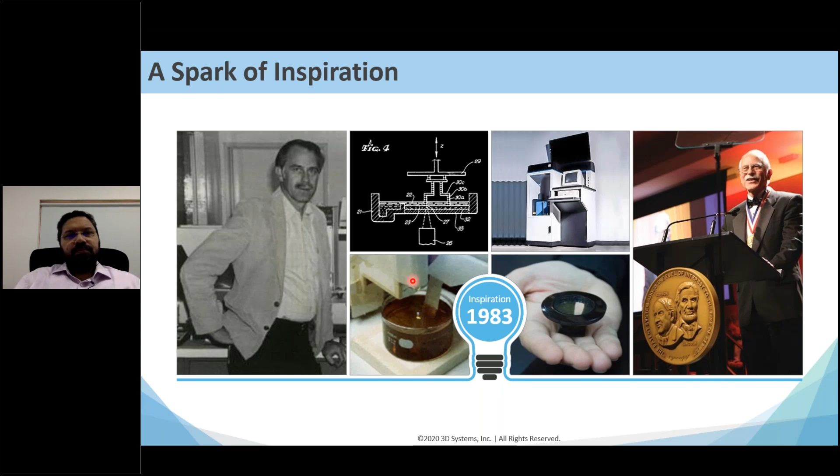Another slide about our company. We were founded in 1986, and we have around 2,600 employees worldwide. We are available in 68 countries, either directly or indirectly through our channel partners. We have 13 facilities, and around 1,000 plus global patents. There was a time when we had more patents than employees, but ever since we have scaled up, the employees have become more. We are headquartered in Rock Hill, South Carolina, in the US.

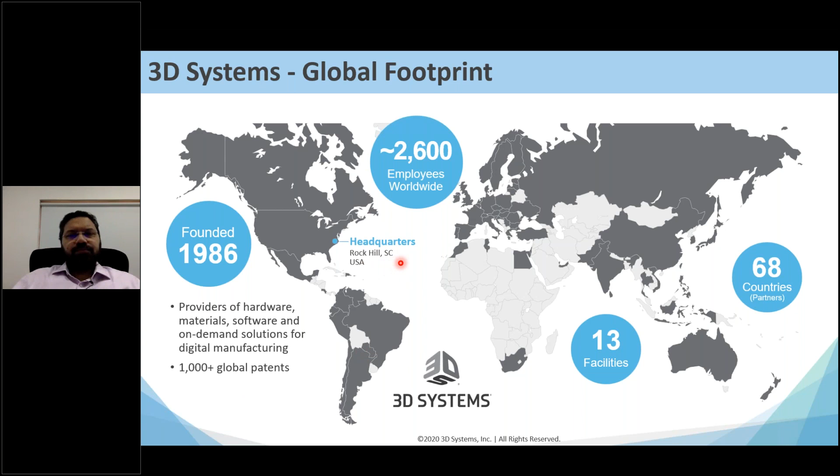These are the main industries that we cater to. Healthcare is one. There's dental; although dental and healthcare fall under the same thing, the dental solutions are very different, so that's a separate vertical according to us. Aerospace, automotive, and also durable goods. These are the major verticals. However, there are other smaller industries like jewelry, jigs and fixtures, and casting, which can go across these industries and play an important role as well.

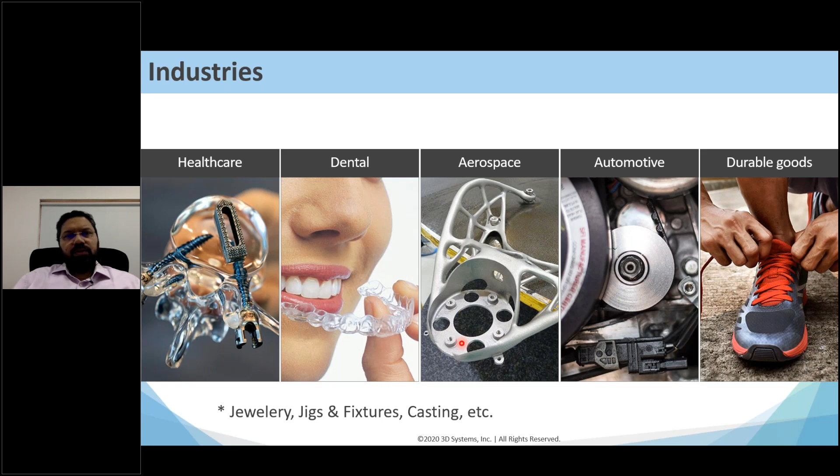So my talk is basically about the emerging trends. But before I get to that, I want to show you a few parts that have been 3D printed. This is a buckle. This is a vent of an automotive car. This is a full color model of a tool. This is a 3D printed model of an engine, a manifold. This is a full color model of a shoe, and this is of a rubber part. It's flexible. This is a metal print of a dental prosthesis.

In this image, you see three things. This is a wax printed part, and this is the casting made out of the wax printed part. This is also the wax part, and this is the casting made out of it. This is a medical implant. It's a spinal cage actually. And this is a metal part of a fuel injector, and it's a section which shows you how intricate it is. This is also an SLA part, basically a pattern used for casting.

Now, the reason I'm showing you this is because over this week, you are going to learn a lot about 3D printing, different processes, different ways to print, STL files, CAD models, and everything else. What I need you to keep in mind is that there is a difference in the end use: prototyping versus production. To the left of this line are prints used in the prototyping stage, and on this side are all parts used in the production stage.

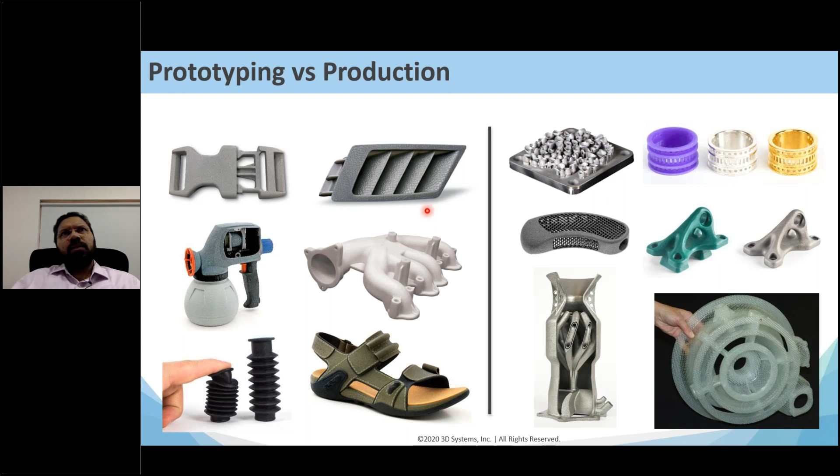And eventually you will use maybe plastic injection molding or say vacuum casting to actually make these parts in bulk. Okay, so this is something that you have to keep at the back of your mind, and then you will understand where I'm going when I get to the slides about the emerging trends. Okay,

so there are 4 emerging trends which I'm going to talk about over the next 1 hour. One is how 3D printing is being used to maybe do the part of vacuum casting, maybe do some part of injection molding, maybe do some part of medical implants, which is turning out to be a far more interesting way of making implants now, and I'll explain why.

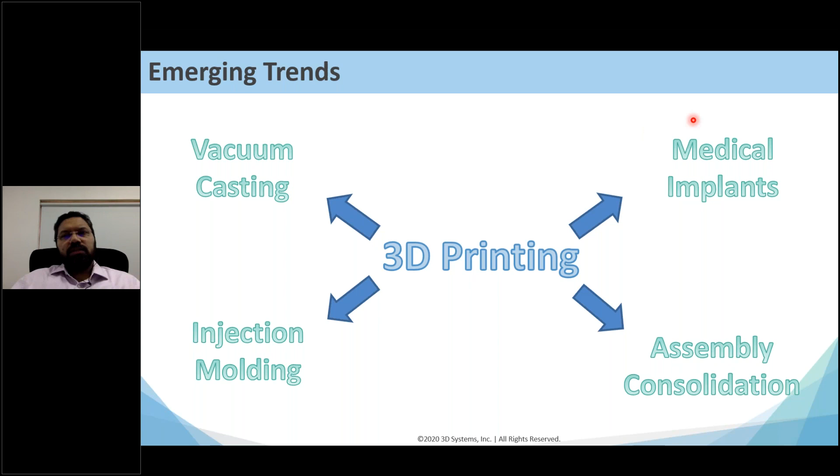Also, assembly consolidation. This is a term used to, if you have a very complicated assembly of parts, do you really need to have that assembly of say 5, 10, say 20 parts? So can you re-engineer the whole part so that it is just 1 or 2 parts, and then you use the benefit of 3D printing? So these are the emerging trends. I will tackle both these in one set of slides, and then have separate slides for the implants and the consolidation.

So let's talk about the traditional manufacturing. So this is more on the plastic side of the business. So if you look at this graph, on the y-axis you have the unit cost. That's the cost to print a single part. And on the x-axis you have got the quantity. So if you see orange, injection molding, the curve goes like this. Why? Because if you have to print just a few parts, the cost per part is very huge. Why? Because you have to make the mold, and you have to machine the mold. That takes a few weeks and then costs maybe thousands of lakhs of rupees.

So if you want to manufacture just say 20 parts, then the cost per part is going to be very expensive. But as the quantities go higher, then the cost per part drops down. So injection molding makes sense when you have to manufacture a large number of parts. There are sometimes you need a lesser number of parts, and injection molding may not make any sense. So you use vacuum casting. So vacuum casting is not a process which can be used very effectively to manufacture thousands of lakhs of parts. It is for smaller numbers.

So if you see in blue, this line is completely horizontal. It's flat. Why? Because the cost per part for 3D printing doesn't depend on the quantity. You have a printer, you have the material, there's a fixed cost that you assign for one part, and that part cost comprises of the cost of the material and cost of the printer over time. So it's basically a fixed cost. So 3D printing completely is able to replace vacuum casting. So the rule of thumb is that whenever you have an application wherein you have been using vacuum casting to manufacture a few parts, that can now be completely overtaken by 3D printing.

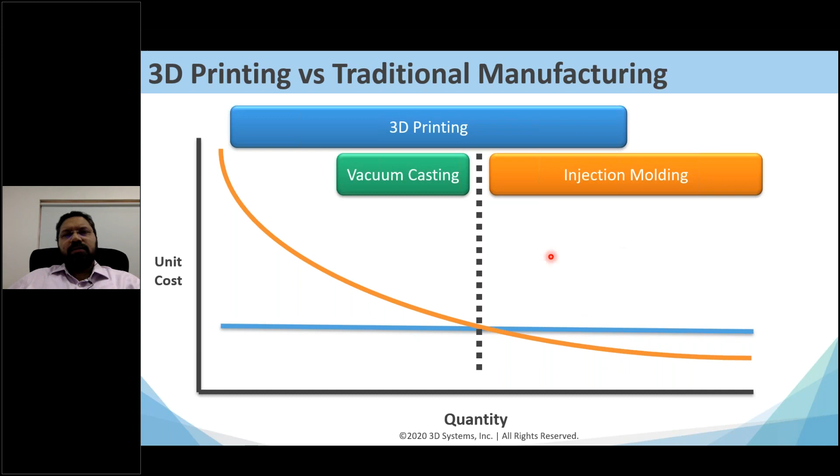If you see, this also spills over to the injection molding side. So that's also true. Over some part of injection molding, it still makes sense, and I'll explain why. Because although the cost of the injection molded part is lower, and the cost per part of 3D printing is higher, there are some instances wherein it still makes sense to use 3D printing. Okay, and as I go through the presentation, you'll understand why.

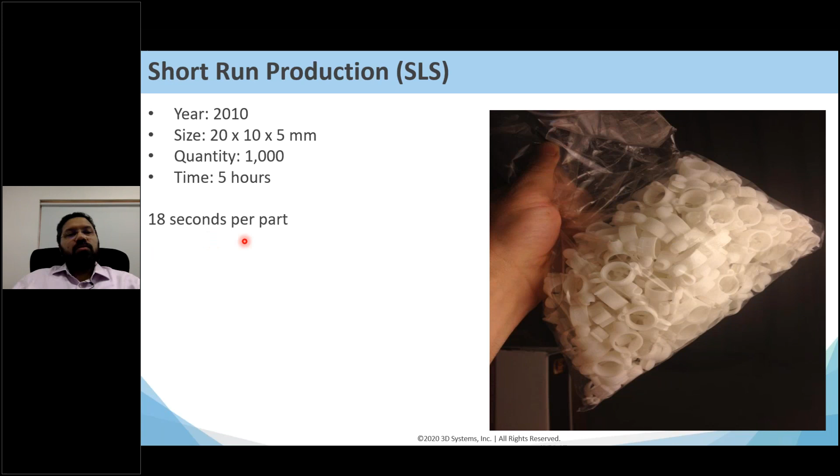So let's talk about production, how it happened in the past. So this is an SLS printer, and this was done in the year 2010. We wanted 1,000 parts, and we were able to print it. So this is an example of how we used 3D printing for production about a decade ago. Now, what you don't see here is the cost per part. The cost per part was quite expensive, but there was a need because these parts were actually required urgently. So that is why it was done. So if you filled up the platform completely and made all these parts, this is the amount of time it took to print per part, which is extremely small.

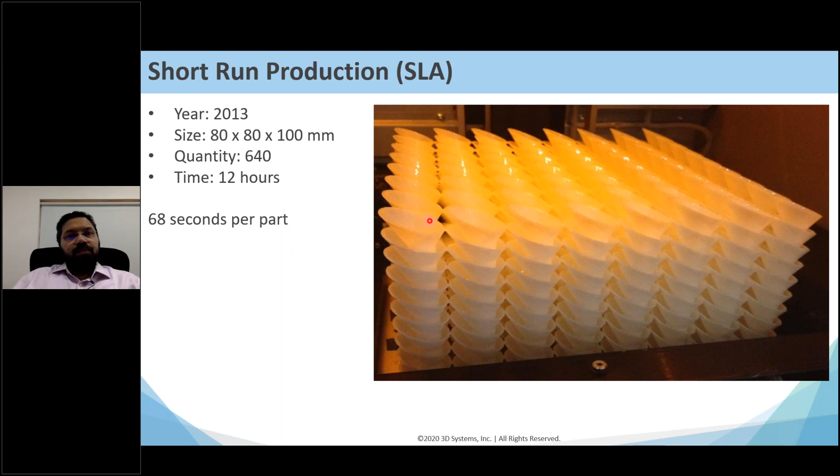This is another example of an automotive part. So bridge manufacturing is a term used in the industry when you need to have parts urgently made as a bridge to the traditional way of manufacturing.

So this was an automotive part. There was a last minute change in the design, and until the tooling could be made, there was an urgent need to actually release the car. So we went and printed all these parts, and that's how it was done. And then after, we came to know that it's not economical to print, but due to the time constraint, that's the decision that we made.

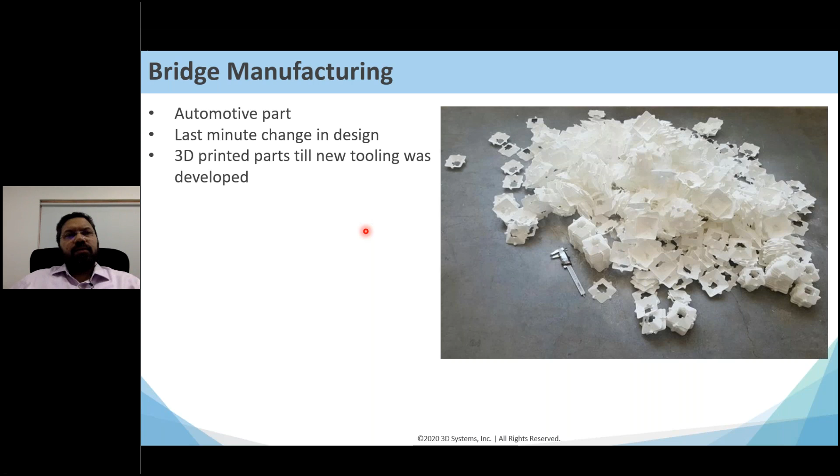Now I will come back to these 3 slides later on because I want to show you an emerging trend that is coming, which is going against all this logic now. So I want to introduce you to one of our printers. We have an entire range, but this one is important because this shows the trend. This is called a Figure 4 Modular.

Okay, it's a different kind of a printer. It's not just one printer with one platform and then you print some parts on it. It basically has a controller, and there are modules. Each module can have a different material and can print a different part. Now, this controller can control up to 24 modules. What this means is you can basically set this up as a small factory.

Okay, this is the build volume, and the thing to be noted here is the print speed. We can print about 100 mm per hour, which is very fast. In the 3D printing world, this is a very fast kind of a speed. You can see with this kind of a printer, you can print about 10,000 parts per month. And the material is fed completely automatically, and the curing is done in basically minutes. So this uses a resin, and it is cured using a UV light.

And as you can see from the pictures here, there are no visible lines at all. If you've seen maybe an FDM printer which you'll have made in your lab, you will find lines, right? Those are the build lines. Now you will see that if you put load on that part and stress it in all kinds of ways, there are weaknesses in the part along those lines, because they're built in layers. So although it is fused, still the material properties are not isotropic. Isotropic meaning whichever way you orient it, the material properties will be the same.

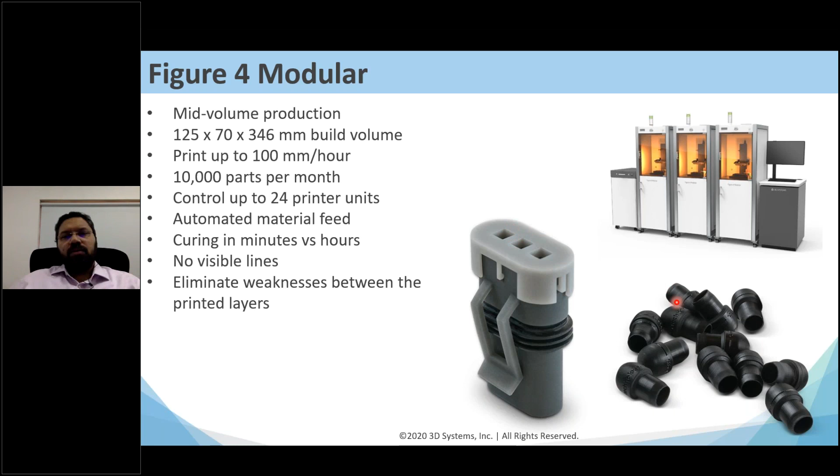But if you see here, this is the kind of surface finish and the detail that can be got with this printer. And in the next slides, you'll understand why this is important in terms of manufacturing. Another important thing is the material.

One thing that happened all over these years was that there were some printers that could print very fast and could print in large volumes, but the material that was used by them to print didn't lend itself well to a production environment. For example, if you take a resin and you cure it to form a part, that part is then exposed to UV light that's in ambient. So there is obviously sunlight on it. So over time, these parts get overcured and then they turn hard and brittle. So although this was good for prototyping, if you use it in a production environment, sometimes it wasn't good.

So we as a company have now come up with materials which have long-term environmental stability, like 5 years or so. There's also this particular material called the PRO-BLK 10 that has got very good mechanical properties as well. So the HDT is quite high. It means that it can be kept in the sun. It won't deform, it won't break, it won't turn brittle, and it's got a good elongation at break as well.

If you see this picture here, the part was pulled from either side. Before the part snapped, it actually necked. So necking is when the part turns smaller and then it breaks. This is a very good property of thermoplastics, which this material now has. All other previous materials that we had didn't have this kind of a property.

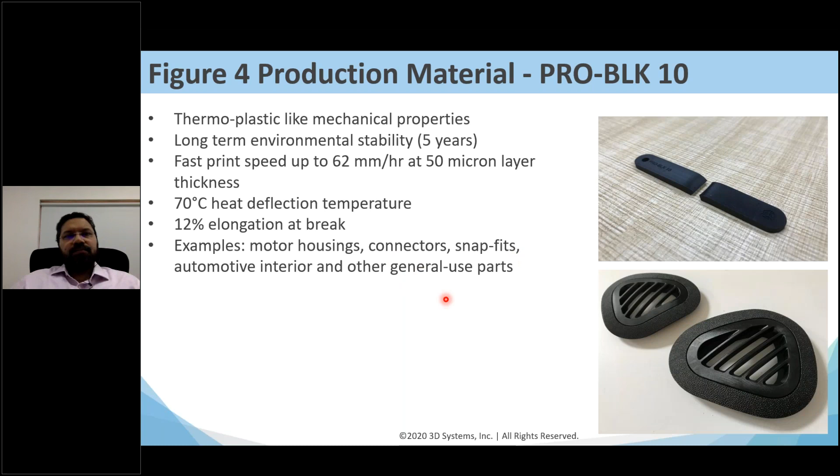So let me give you an example. Let me actually run you through an example. This is an automotive part. Now, this part was actually an assembly of 4 or 5 parts. This is a part used next to the windshield washer. So to give an idea, a zip tie goes in here and comes out from here. There is a washer put here and a bolt goes through to actually secure the part. And here is a sensor. This is what it is. This has been re-engineered now.

Now, if any of you have got some experience in injection molding, you'll soon look at the design and see, okay, this part cannot be made using injection molding. How are you going to make the mold? Where actually will be the parting line? How are you going to maintain all these channels? Okay, so this shows the benefit of 3D printing in the sense that you can now come up with designs which can be printable and which cannot be made in any other manufacturing technology that is there right now.

So we'll use this as a nice example to show what the emerging trends in the market now are. And this is what you should start to think when you go through this course and also do your research. Don't just think of taking parts that are already made in traditional ways and printing them. That is solving half of the problem.

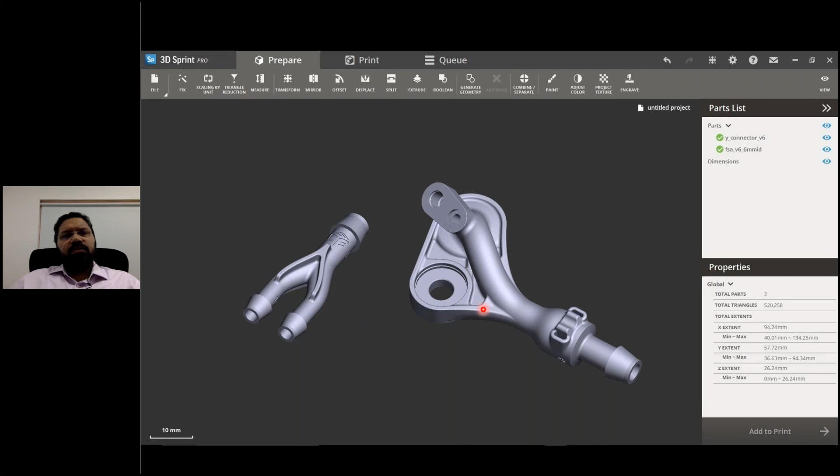Yes, so you have to ask all these questions. This is the real value add that you'll get from a course like this. So let's use this example and go through the entire process of actually 3D printing these two parts. It's a pair actually. Okay. So this is how we basically set up the build. So this is the build volume, and we have done vertical stacking, and we have nested the parts to such an extent that we have used almost all the space.

Now you have to understand this is a production application. Okay, so let me give you an idea. We needed thousands of these parts to give as handouts at Formnext. Now Formnext is the world's largest 3D printing exhibition in Germany, and last year we wanted to print thousands of these parts. Okay, so we had to basically assume that this was a manufacturing application. So this is not prototyping anymore. You just don't want to print one part, you want to print thousands of them. So you have to think differently. You have to set up your printer in a way to optimize everything.

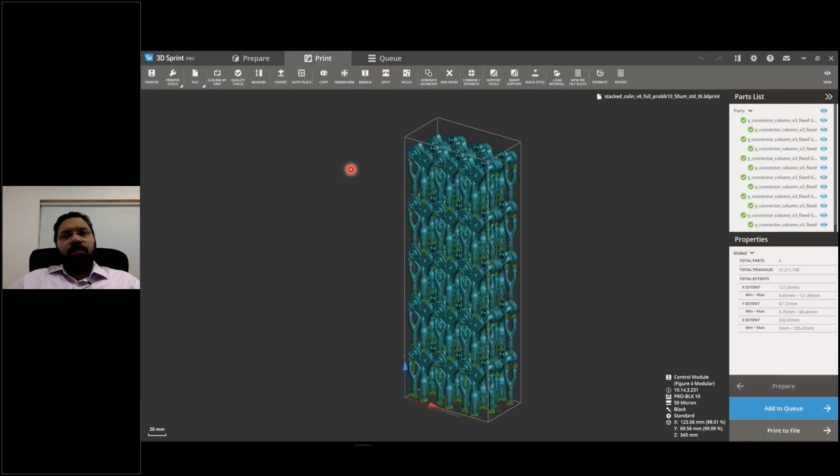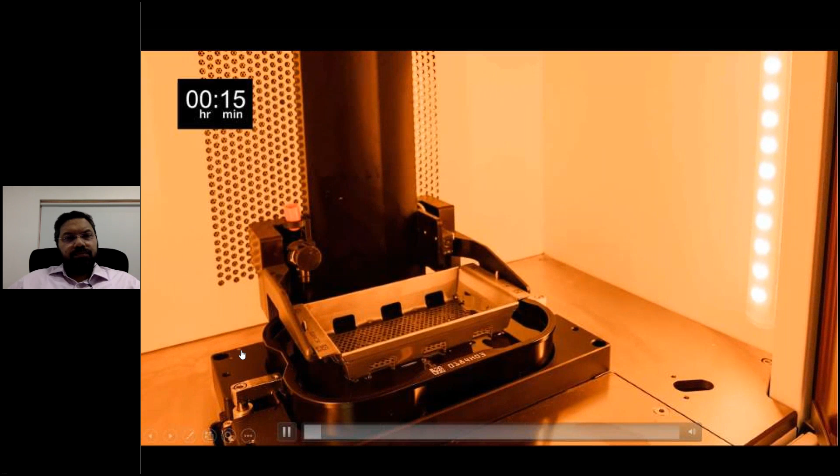And I'll just play a video. Maybe you'll not hear the sound, but it's only music. But it's a time-lapse video. So you can see 2 hours here. So in about five hours, we have printed 120 parts. So it comes to 2.5 minutes per part.

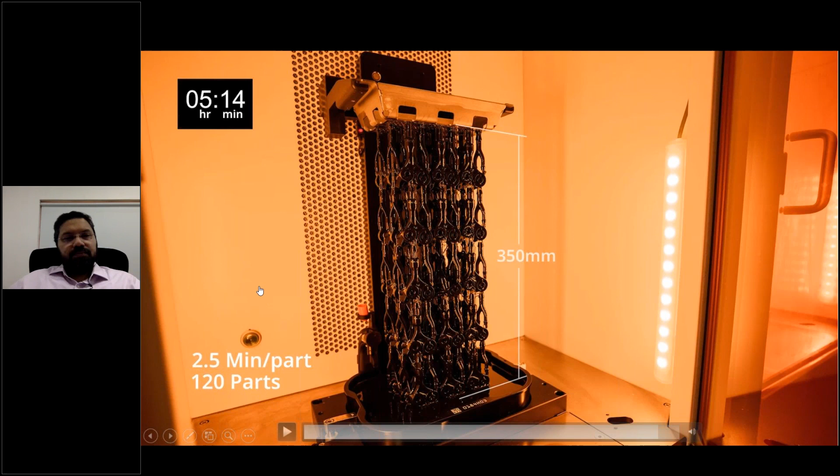Okay. Now, remember what I said earlier about the cost per part, right? Using the older ways of SLA, SLS, the cost was extremely expensive, but then it was important to do it because it was a time critical thing. So they said, okay, let's spend some more money, but print these parts instead of waiting for the tool. But now look at these prices. This is a design which you cannot make by injection molding, okay? And it costs only $2 per part. This part cost 62 cents.

This is amazing. And this is the emerging trend that we see in the market right now, which is being adopted in the US and in Europe. So the Figure 4 Modular is being acquired by a wide variety of companies as we speak, and they are seeing the benefit of this, and they are seeing that they can completely change their designs and print parts which they could not manufacture.

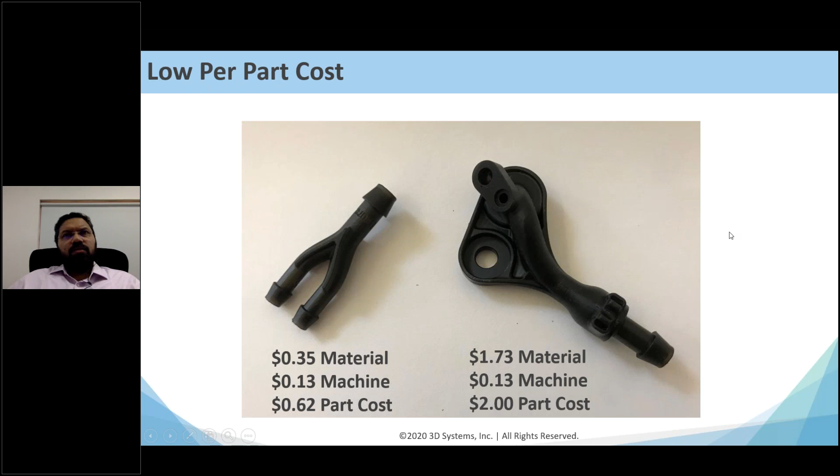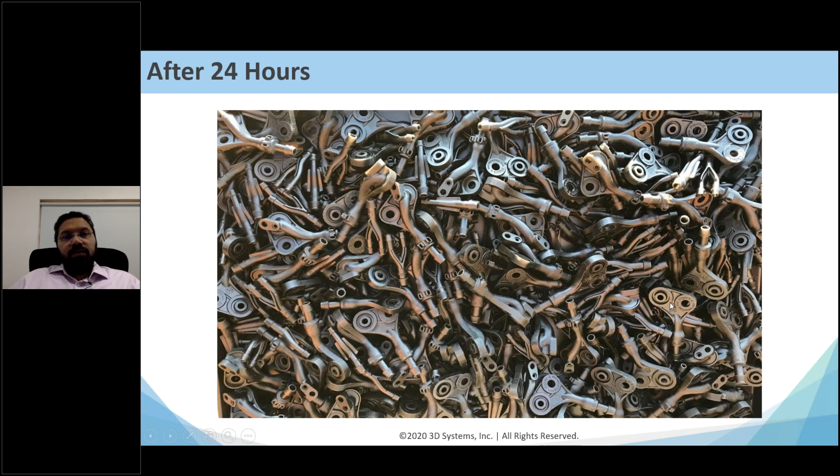Okay, now this is what happened after 24 hours. These are the number of parts that we got. As you can see, it's lots. This was after 48 hours. So basically, we had to put all these parts in one big box and ship them from our San Diego office where these were printed to Germany, and then we used to hand it out to everyone who came at

our booth. This tells you that now 3D printing with the right printer, with the right material, and maybe the right design as well, can be used for manufacturing, and it is economical, it is better, and it is much more cost efficient as well.

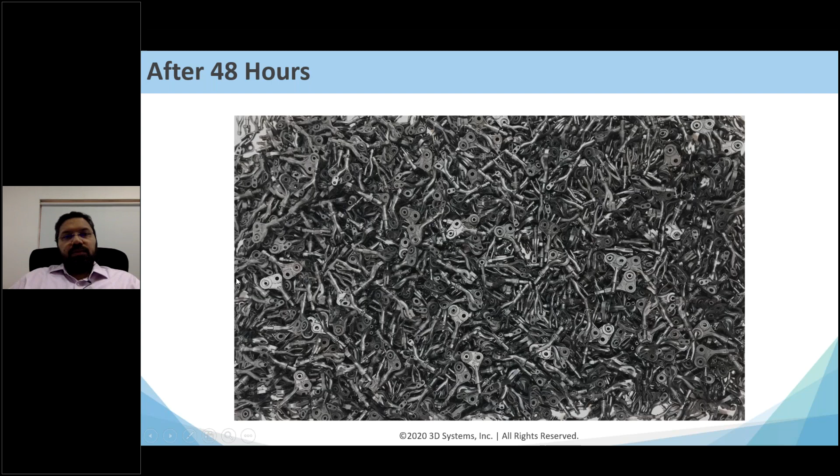They say the proof of the pudding is in the eating. So here is an example. This is basically the picture of the Figure 4, and you see this part over here that's actually blown up. This part is actually printed on the Figure 4, and we are saying why not? Because we just need maybe 500 to maybe 1,000 a year, because we just launched this printer.

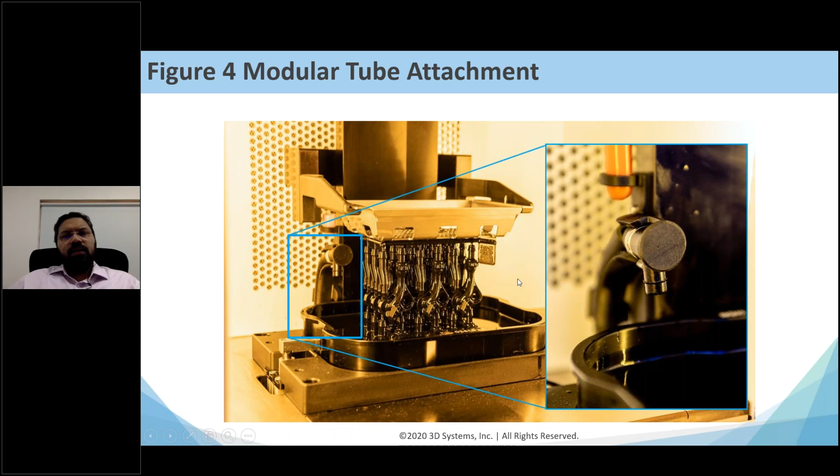There's no need to make a mold to actually manufacture this part by injection molding. So we just planned, let's just print these parts, and this is the design. Now here's the interesting thing. So in a batch that takes 8 hours to print, we can print about say 12 parts. So it comes to 40 minutes per part, and that's okay. Why? Because we just need 500 to maybe 1,000 a year. So it's fine. But here's the interesting thing.

This is a new product, right? So there can be times in which we may need to change the design all the time. So maybe this angle needs to be turned more, maybe this hole has to be got in front. So if we had a mold, we have to redo the mold the whole time. So that turns extremely expensive. There's also lead time. So here, quick design changes are possible if we print. Because if we say, okay, let's move this thing over here or change this angle to make it thicker, then that can be done the next day itself.

You can prototype it and then directly print it. Maybe the part fails here. Maybe we have to have 2, 3 ribs over here. So we can immediately do that, and this enables us to have a just-in-time management for inventory. So you don't need to place an order with your supplier saying, okay, I want 500 of these parts, go and give it to me. Then your design say changes halfway. You go back to the guy and say, okay, I want this part in this color. Then he can give it to you in that color. So

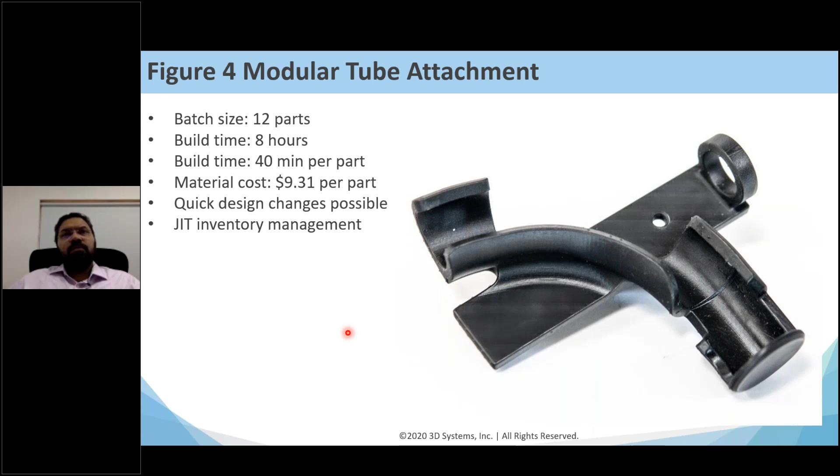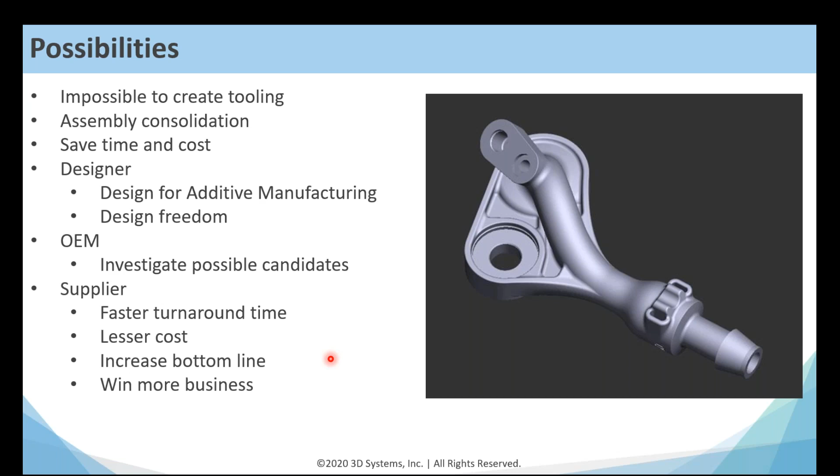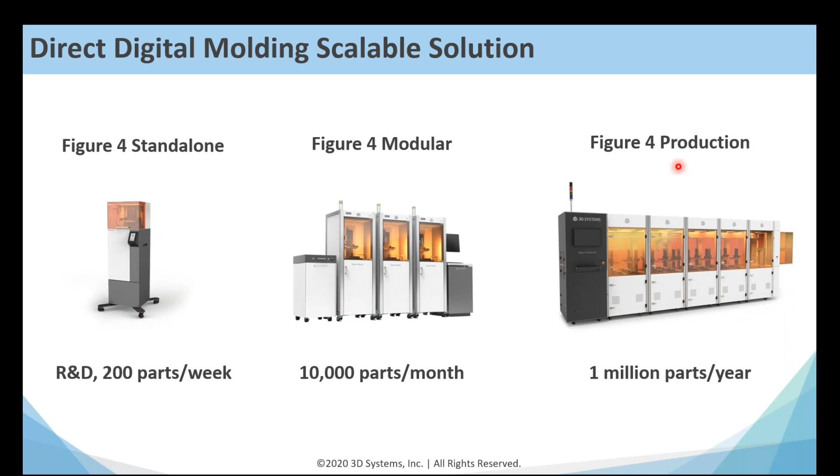Now, if you want to really scale up, print like 1,000,000 parts a year, then we have got something called the Figure 4 Production as well, which is basically there are 4 print engines in each module here, and there are also robotic arms that come and pick and place parts, wash them, dry them, and it is completely insanely customizable and also automated. Okay, so this is where it is now.

The next emerging trend that I would like to speak to you about is the use of 3D printing technology for medical implants. So let me just walk you through the workflow first. The end product is this implant that you need for a patient. So first you scan the patient, then you use a software. This is our product. It's called D2P, but you can use others as well, which takes the CT scan data, which is basically black and white or grayscale 2D slice images, and converts it into a mesh. Then after that, the next step is to use an organic modeling tool to actually design that implant.

To help in the organic modeling, we also offer a haptic device, which is basically a touch-based thing. So it works like this. You hold this like a pen and you move it around in space. And wherever the cursor hits an object on the screen, you get a force feedback. So it's like sculpting. This is good because you cannot make a design like this in something like SolidWorks, because that uses lines and arcs, and a human being is not made up of lines and arcs.

After you make the implant, then you need to lightweight it. You need to make internal and external lattice structures, which really give you the benefit of 3D printing this. This is another software that we have called 3DXpert. In fact, you all have a license of this. A license of 3DXpert comes along with the DMP Flex 350, which is there in your lab. Then after you do the design of the implant, you actually print it in a 3D printer, and then you operate. This is basically the workflow.

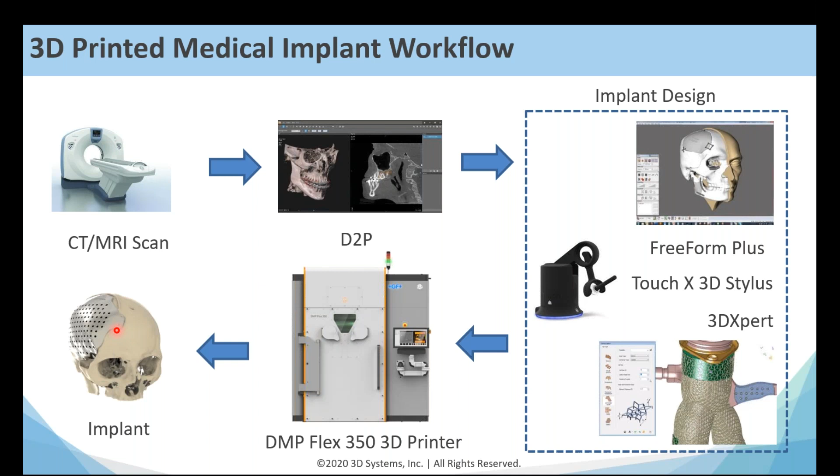So this is the benefit of doing this by 3D printing. You can make volumetric lattices like this, and also surface lattices. You can parameterize them. So you can actually open a dialog box and choose the parameters of what should be the pitch and the angle and the number of nodes and the kind of design.

Then choose the volume on your screen and say fill, and this whole thing will be automatically made. You can print it, then you can test it, and then if it is not good, then you can come back here and change the design, just a few clicks, and then you have a new lattice structure.

Now, why do you need lattice structures? See, this is an implant. This is going to go into the human body, and this is going to go and attach itself to one end of a bone. Now the bone needs to fuse with the implant. If it doesn't fuse well, then it will fail, it'll come loose, and then the patient will need to be operated on again.

So because you can print insane geometry like this, that is why you have better osseointegration. So the bone will grow into it, like the roots of a tree. Even if there's a high storm, and the top of the tree is being pulled and pushed everywhere, the roots are so ingrained inside the soil that the tree doesn't move anywhere, right? So that's the same kind of concept used here as well.

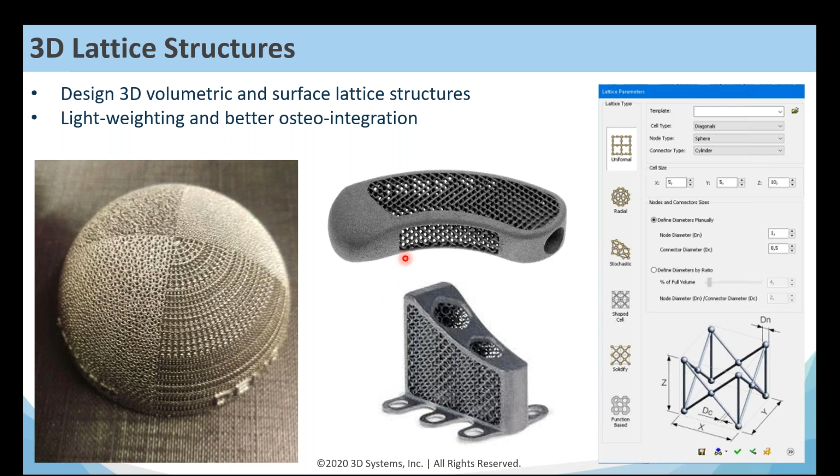Also, there may be cases wherein the bone needs to grow over an implant, because the implant needs to be really strong and solid, but the top of it needs to be very rough. Now the traditional way of making implants is by CNC machining. Now you can see this can't be machined; it's impossible, right? But using 3D printing and using software that lends itself well to this kind of an exercise, you can actually come up with some really nice implants with a very low failure rate.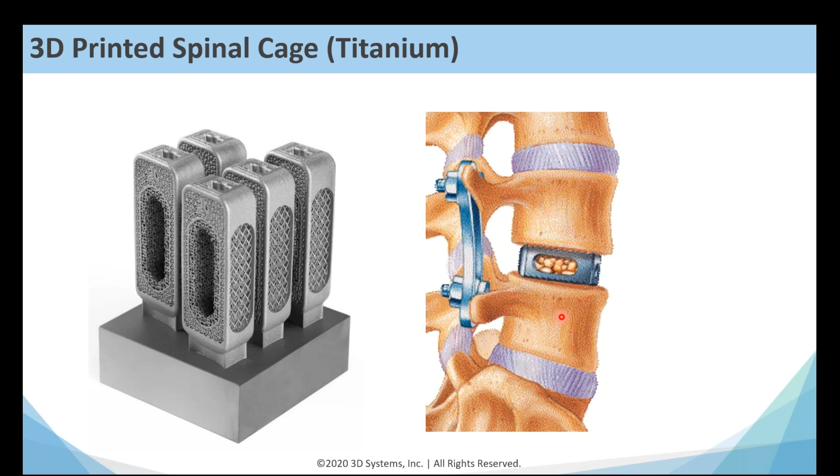So this is a slide explaining osteointegration. So this is a spinal cage made on a metal 3D printer, and this is used as a replacement. So this is a spine, and this cartilage kind of a thing was removed here, and an implant was put in its place, and then you can see the bone that's growing completely into it. This is how osteointegration is done.

This is another case of a canine implant. So this is an implant for a dog. So there's a condition where the lower limb of the dog is weak. So what they do is they slit the bone, and then they put this implant and they screw it here, here, here, and here, and that's how they give this a thickness.

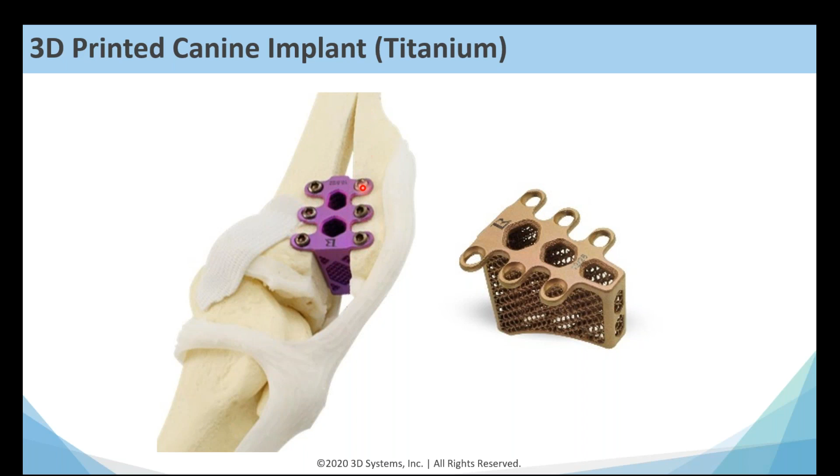This is a case of an implant done in Erode in Tamil Nadu. This is a live case actually. This was a very complicated case. As you can see, there was a cancerous kind of element in the lower jaw and also in the top part of the jaw. So this one case needed 3 implants, one for the lower part of the jaw, one on the top right, and then the top left.

And all this was done. So this white thing is also 3D printed. So we use the 3D prints of the bone to test the metal implants as well. And then finally, the operation was done, and it was a success.

Now imagine if there was no 3D printing. What would happen was the doctor would have to use the CT scan data, look at the X-ray kind of images, and try and guess what the situation would be when he operated. And then he would have to open up the patient and say, oh, I thought this was the case, but actually it is not. The case is a little bit more complicated. Then he would have to think on his feet, and he would have to cut more and plan less and do all kinds of stuff.

And then he would have to take pieces of, say, titanium and actually bang them into shape. So this is what actually happens in the OT. There are heavy metal tools which the doctors use like a blacksmith, and they hit pieces of titanium so that it gets shaped to suit the patient. There are times wherein they have to modify the patient to suit the implant, because they can't change their implant anymore because it's quite complicated. So all those variables are taken care of by 3D printed implants.

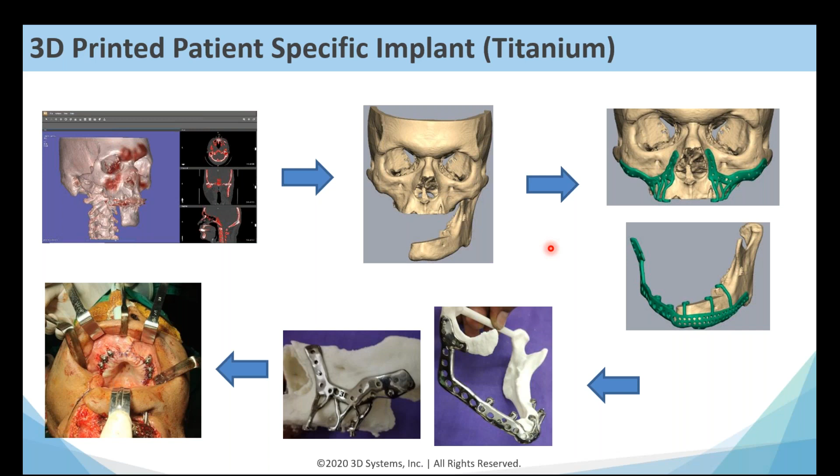The fourth and last emerging trend which I want to talk to you about is assembly consolidation. Now, if you look at this, this is an automotive exhaust, okay? This comprises 20 parts. And if you look at these parts, you can see that the person who designed this was already thinking about how he was going to manufacture it. He had certain manufacturing processes in mind, and that is how he had to take his idea of a full-blown exhaust and cut it up into parts so that it could be manufactured.

Then what happened is we told the guy, okay, you have got complete design freedom now. You have to follow the rules of 3D printing, which we'll explain to you, but you make up your automotive exhaust completely as you like. And what he did is he reduced the 20 parts to one part, and this is the thing. This is completely made using 3D printing as one piece itself. It is the same job, but it's actually better because in the end there was a 75% reduction in production time.

So you can imagine how much time it'll take to make each one of these parts. You add them all up, time and resources, and then you compare it to the amount of time it'll take to make just this one part. Then you have to also add the assembly time, and then you have to check for errors because there's fitment errors, there's mating errors, there's all kinds of stuff, assembly errors. All that is not there here; here everything comes out as a piece.

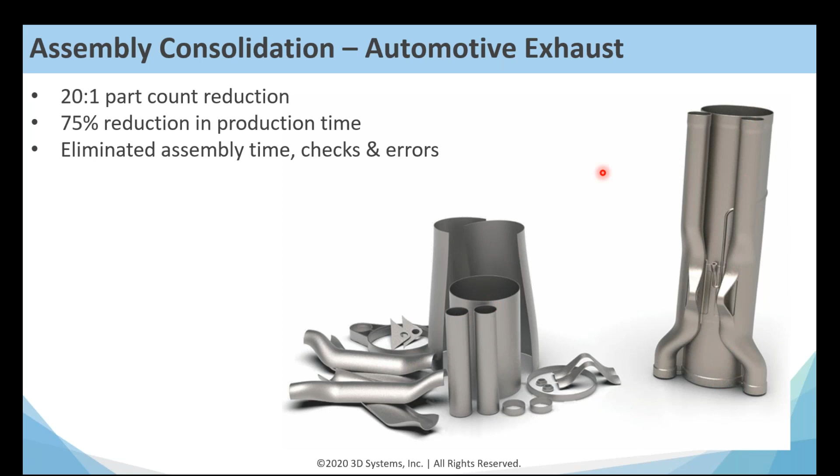This is another example of a quartz glass burning tool. This was how it was earlier. This also had 20 parts. As you can see, there are joints everywhere. Now this was re-engineered to look like this. This is just one part, completely one part. It's hollow inside, so that the gas can flow through.

Now, 50% less material was used. There was a reduction in the production time as well, and it is 60% more cost effective. Over and above that, it lasts 3 times longer. So here's another example of how an assembly was there, and somebody re-engineered it completely.

So while you go through this course and through your additive manufacturing journey, don't take geometry that comes to you as something that is set in stone. No, you're an engineer, okay? Your job is to think in a creative way. Just because somebody made something in certain ways, it doesn't mean that you have to do it the same way as well. At that time, they didn't have 3D printers.

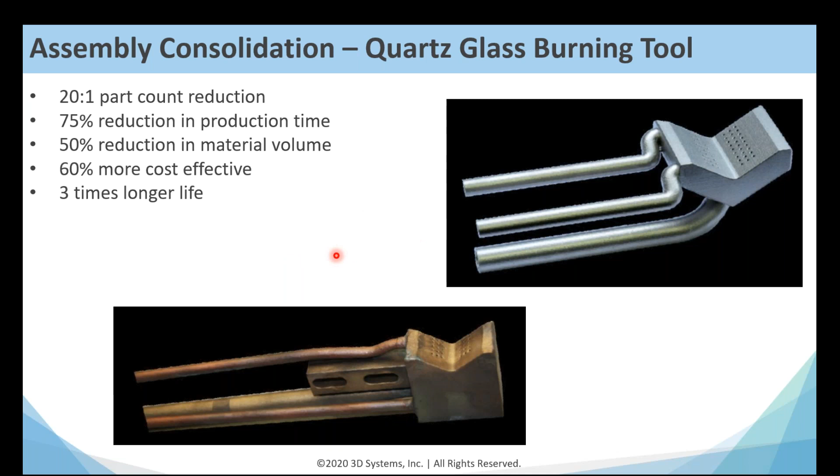They didn't have the processes. They didn't have the materials. They didn't have the technology to make things in very different ways. So they were restricted to what they knew and what they could do. You are not. You have all these tools with you now, and it's up to you to use them in a very effective way.

Here is another example of a heat exchanger. This is a good example because this had 155 parts. As you can imagine, each of these things was one individual part. And here this was completely reduced to just one part. This is made only as a piece. There's also a reduction in the production time. There's also a reduction in the volume. That means it is lighter, and there's also a 20% improvement in the performance.

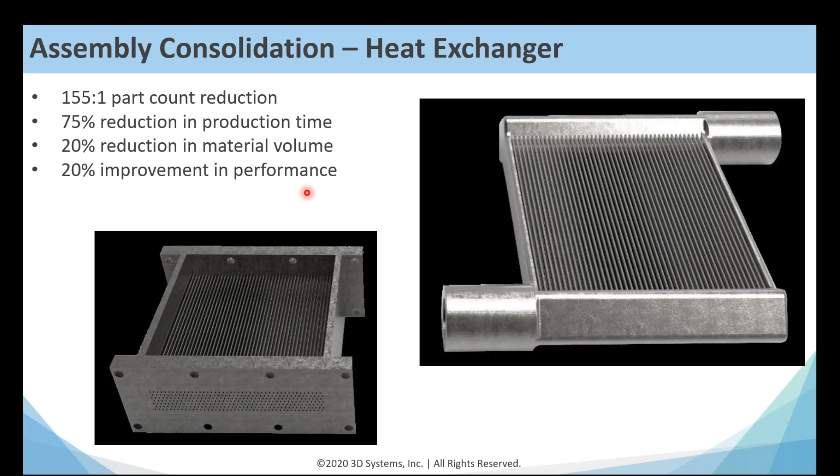So imagine you're an engineer now. You have to solve a huge problem, and you say, okay, let me see if I can use 3D printing to solve this problem, and you have complete freedom to use all the tools that you have at your disposal and come up with solutions that absolutely nobody could have thought about.